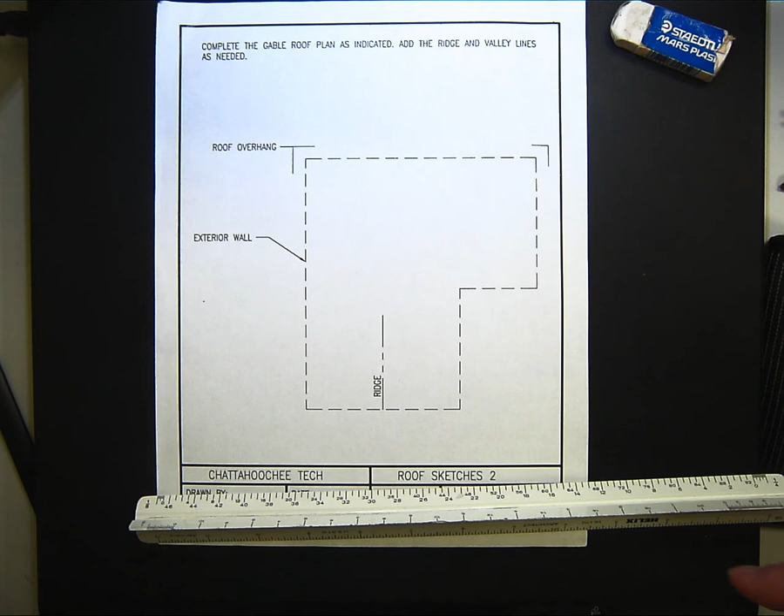Okay, here's our second sketch that you're going to do, and I'm giving you a slightly larger footprint. And this time we're going to take into account the roof overhang. So I've given you the exterior walls in a dashed line and the location of the first ridge. And we're going to do a gable plan with these roof overhangs.

And with this one, you will need to measure those, and it's not to scale, but my overhang is 1/4 of an inch if you were just measuring with a regular rule. So I want to go ahead and mark off all my overhangs, and then I'll draw the roof outline.

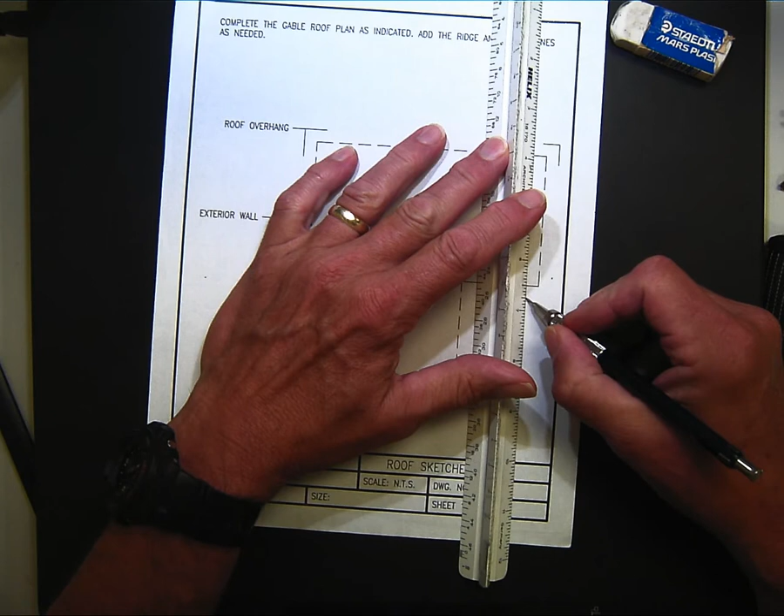And these, I'll go ahead and tell you, these sheets here are the 2 sheets that you're going to use to create your roof model that you're going to do this week at home out of the manila folder, poster board kind of stuff. Okay, so, oh, I didn't put a mark on that one.

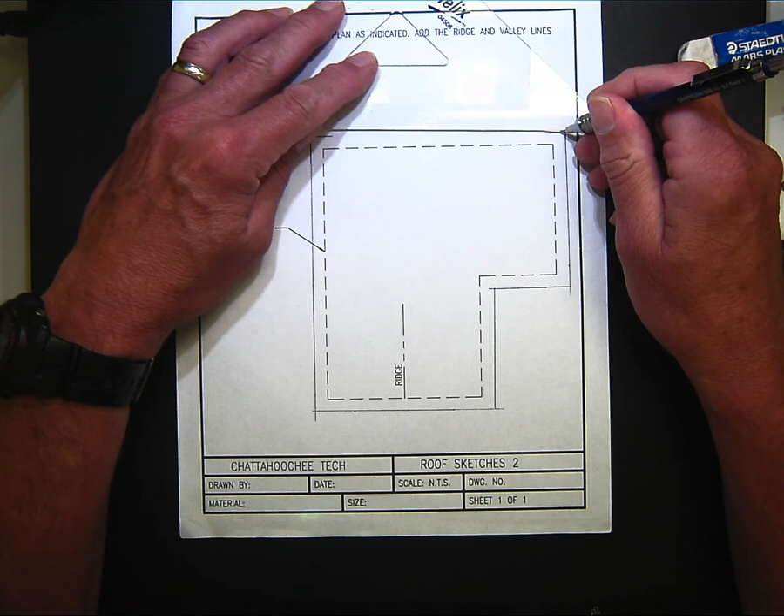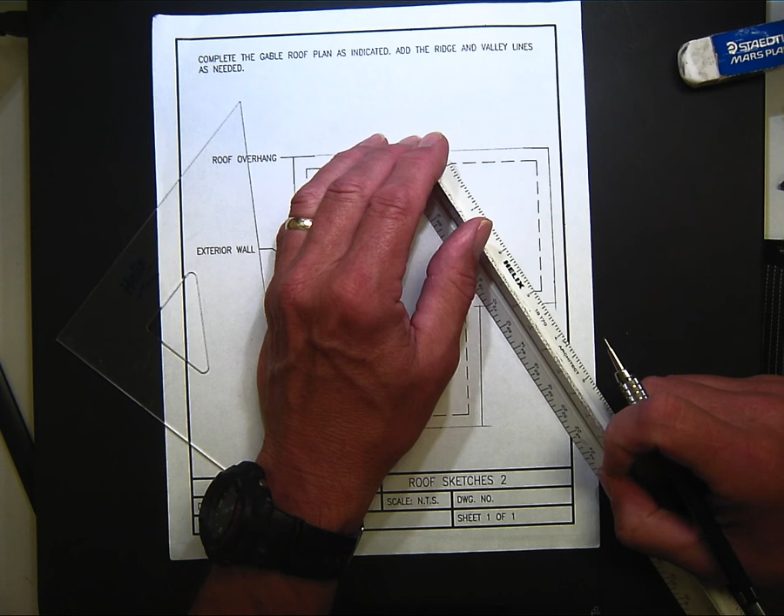Okay, and then my ridge, I've given you the location of the first ridge. And now you need a ridge for this side. So if I measure, there's like 2 5/8. Man, what did I do that for, huh? Okay, so I'm going to go with the halfway again, and I'm going to need to do that twice. You can measure it and divide if you want to, that's fine. I just find this easier, quicker.

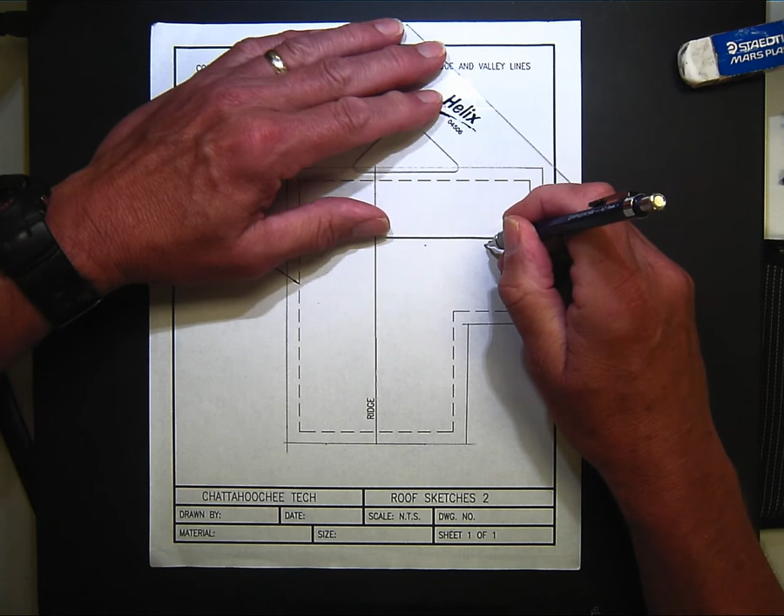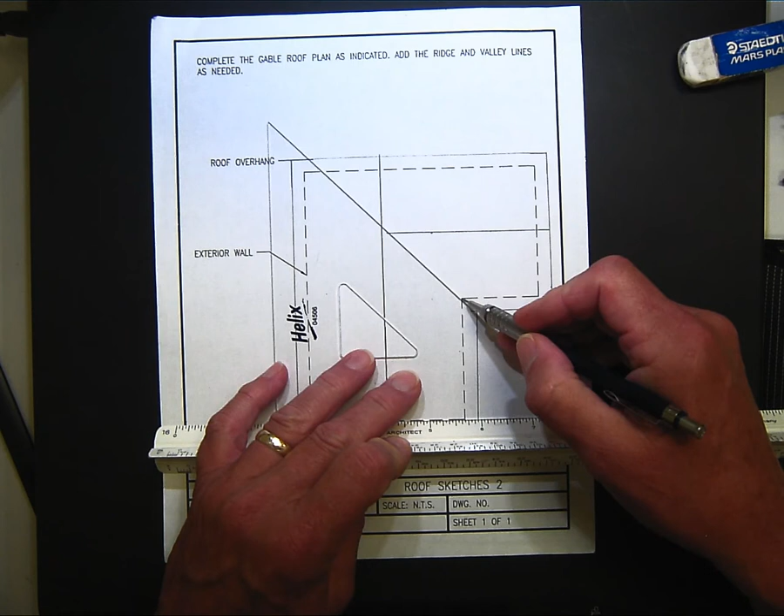Okay, and now I need my 45-degree line, so I'm going to pop my scale here as a straight edge. Okay, and so there's my first one. And of course, clean up your erasures and stuff like that.

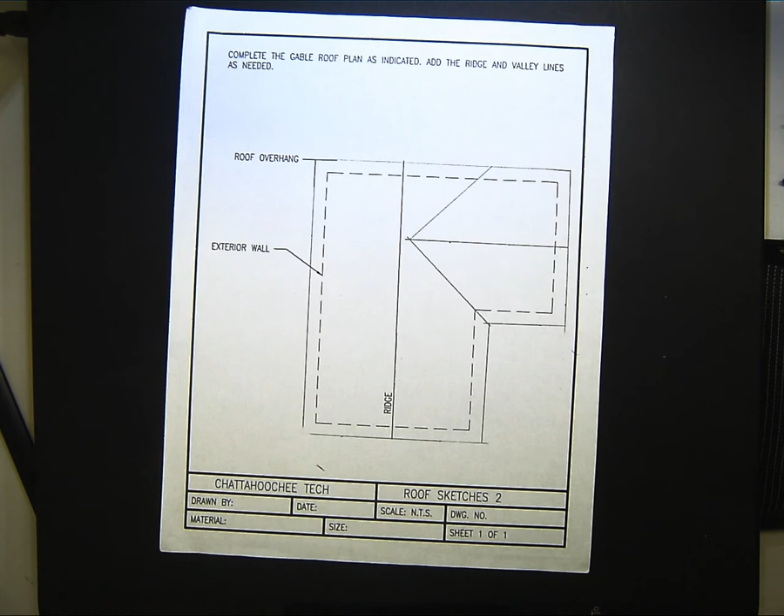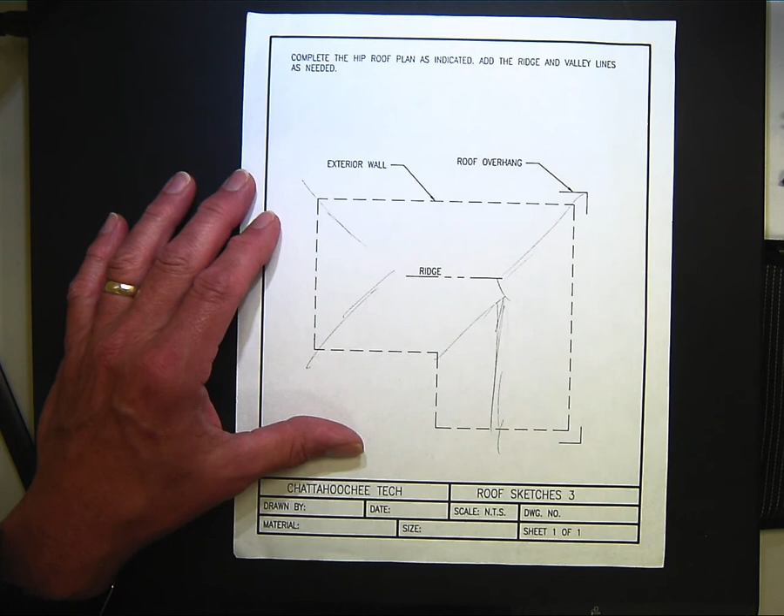it's going to be very, very similar to this one, except you're going to have a hip out here on, excuse me, on this end down here at the front. So that gives you a rough idea of it there, okay? And of course, the roof overhang all the way around.

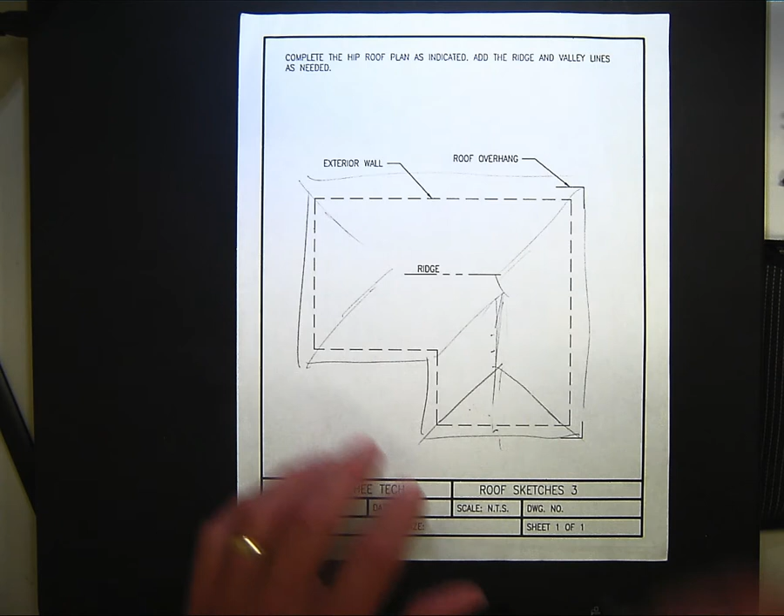Now that's ugly. You're not going to turn in something like this. This looks like crap. All right. You're going to draw it out to scale, just like we did with this one, because you're going to be creating these models from this worksheet. So you'll have this worksheet, and then in Blackboard it tells you what roof slope to use, and you're going to create these models. Okay. If you've got questions, ask me here in the lab.